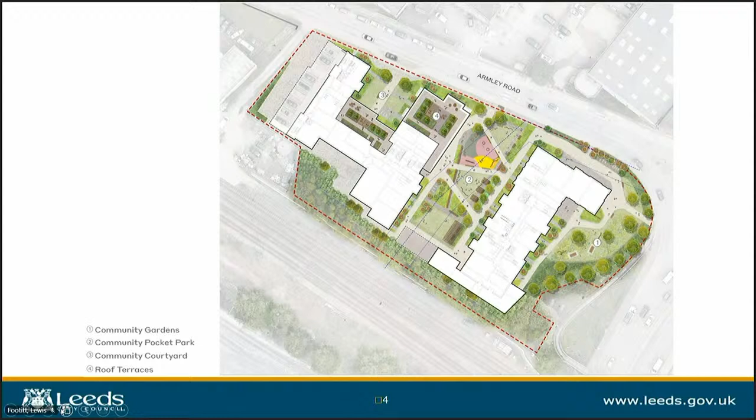Thank you, Chair. Members will recall this scheme was discussed at the March meeting of City Plans Panel, with the item deferred and matters to take away for officers to deal with. Just to refresh memories, this is a CGI of the scheme, and for the benefit of today's audience, the scheme comprises 3 blocks of residential accommodation, totaling 384 apartments, standard units and duplexes. The scheme also provides 191 square metres of commercial floor space and areas of public open space, which I will come on to shortly. This is the site plan on screen, where we can see the relationship between the 3 blocks and the areas of green space just mentioned.

Now, members will recall they were unsatisfied with the proposals on the basis of 3 distinct issues: the proposed level of affordable housing, the level of green space provision and lack of connectivity to nearby green spaces, and the design of the building, most notably how it addresses the corner of Armley Road and Wellington Road, and also the elevation to the A58. So I'll address each of these issues in turn. Firstly, affordable housing.

So I've set out on the screen the progress that's been made on this issue, and the report at section 3.18 sets out the latest and final developer offer on this subject. Members will be aware the proposals were subject to a viability assessment, which set out the threshold on obligations that the district valuer considered for the scheme to become viable, set out at point 2 of the slide.

Further to that appraisal, the developer made an offer at that point of 7 units at discounted rent, taking a longer-term view on the overall profitability of the scheme. The developer has since reappraised their ability to take a longer-term view on profitability and made a final offer to provide 19 units on site as a pro rata extrapolation of the proposed housing mix. This is the final offer which the developer advises is the maximum possible, and it's this that members are asked to consider today. Members are also reminded of the late stage review mechanism secured by the Section 106 agreement to address any further fluctuations in costs and viability at that point.

So the second item is the level of green space provision on the site. Members' concerns were effectively in 2 strands: the level provided within the envelope of the site, and the resulting impact and pressure this scheme would place on existing green space provision in the locality. Members will recall the scheme as presented in March detailed a green space provision of just over 800 square metres.

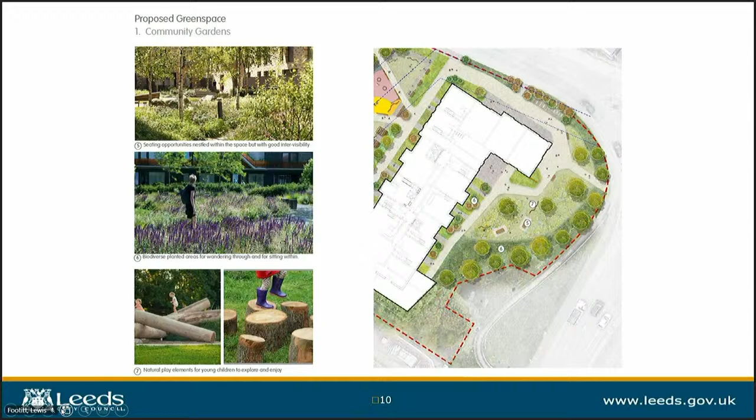We can see the area in question here in its relationship to the cycleway in a section drawing, and we can see how the new area of green space relates to the adjacent roadway from the gyratory, where the new pedestrian and cycle link forms an enclosing element to that space.

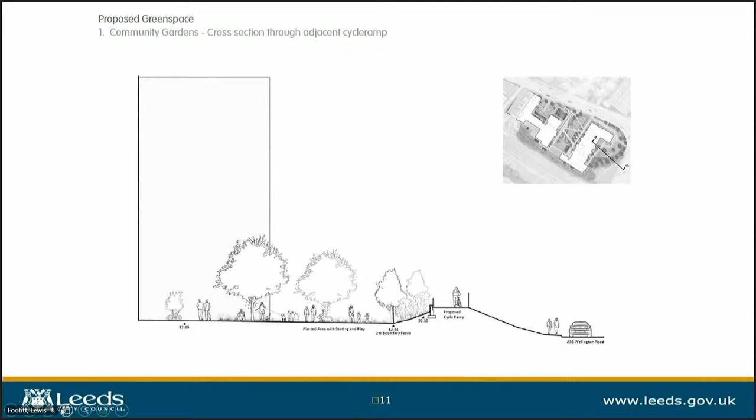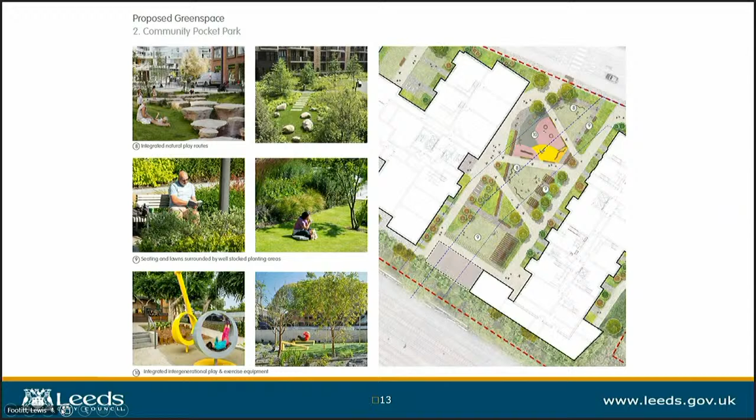And then the final change negotiated by officers is the reworking of the layout of the area at the top of the site, again, which was previously not included in the green space calculus overall, but has been revised to maintain an acceptable layout of defensible space to habitable room windows, which will be buffered using landscaping, but are now also shown to be laid out with seating and lawn spaces, which will be accessible to the public and may provide a useful spot to pause and sit on the journey from Armley Road into the city centre.

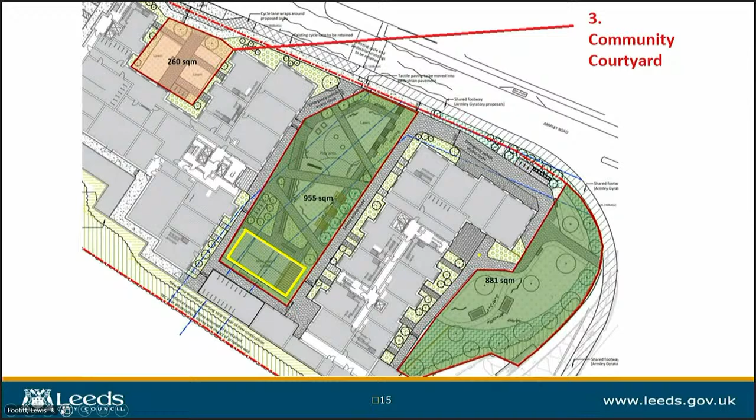Again, the finalised detail of all features here are proposed to be secured through the conditions and the Section 106 agreement in order to maintain public accessibility of the space in perpetuity.

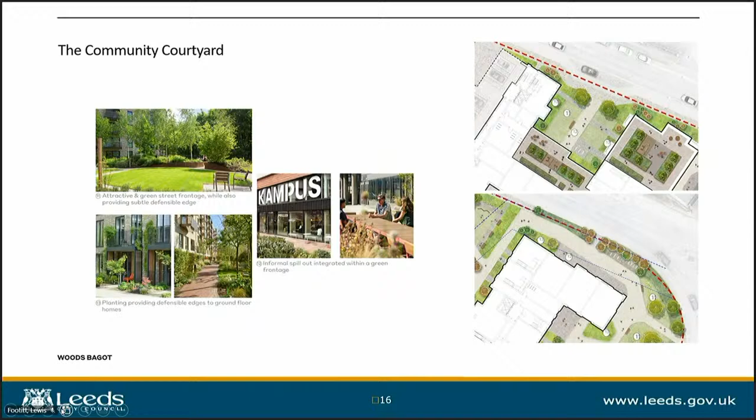So to summarise on the overall issues first strand, the previous scheme would have delivered around 800 square metres. The opportunity presented to the developer and the revised layouts will now instead provide over 2,000 square metres of publicly accessible space within the site envelope.

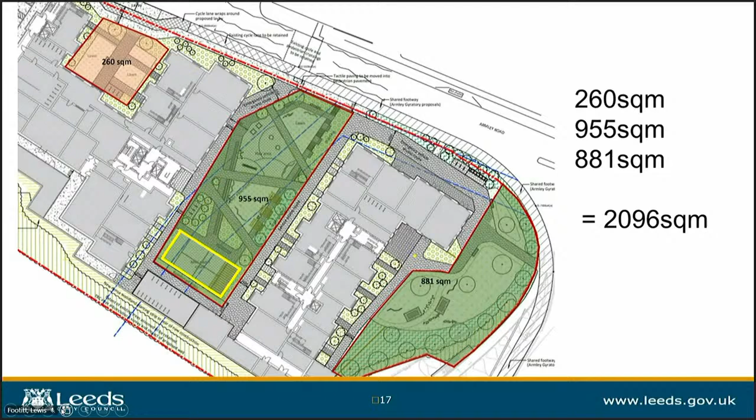Whilst there's no direct comparator to this, just to put that level of provision into context for members, the closest approximate match to that level of provision in the city centre is Park Square, which comes in at just under 2,500 square metres. So that gives you some impression of the amount of space being provided.

So to move on to the second green space issue, members have expressed some concern regarding the pressure this development will place on existing green spaces in the vicinity and how these spaces don't necessarily lend themselves to use by residents in terms of their typology.

To be considered relevant, local green spaces should ideally meet the 720 metre radius shown on the screen there, which reflects the requirement of policy G3 in the core strategy.

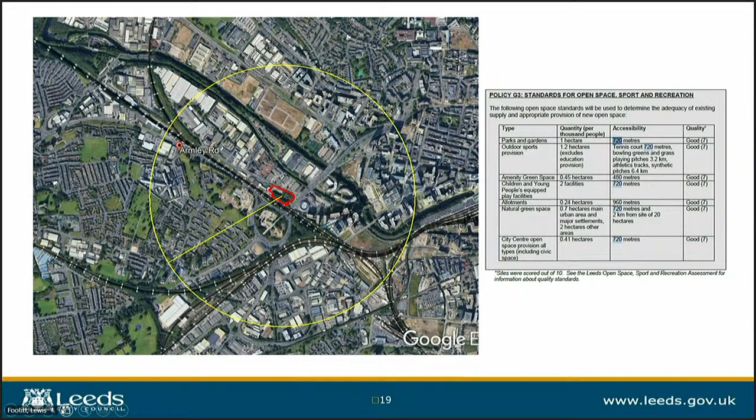Officers have therefore looked at this issue more closely and can advise there is a mixed typology of existing green spaces within the vicinity of the site. The aforementioned additional provision in the site envelope obviously assists in terms of increasing provision, but as you can see from the slide on the screen, there are 4 spaces of different size and flavours which the residents can make use of in the vicinity. I'll go through these now.

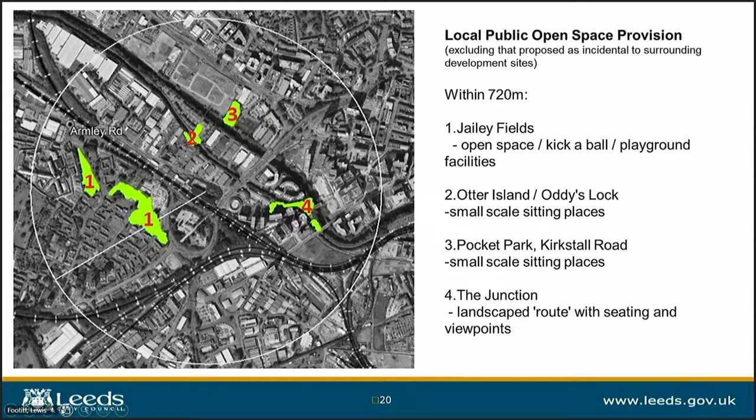The first is within and adjacent to the Otter Island development, where there's some incidental green space in 2 pockets and also access onto Oddy's Lock, which has some seating opportunities and sitting out spaces available there.

The second area is that adjacent to the Powerleague pitches on Kirkstall Road. This area becomes more meaningful and relative to the scheme in that the new pedestrian link across the watercourse is now built and will be operational shortly.

This space affords seating, a place to pause and some limited play space for children. And it's also worth noting at this point that the adjacent City Island scheme will connect into this area and provide a degree of further publicly accessible space.

This slide indicates the closest publicly accessible space at Doncaster Monk Bridge. Whilst it's predominantly a route, the High Line offers an elevated and landscaped area suitable for sitting.

And then finally, and certainly most relevantly, this area shown on screen is known as Jailey Fields. This site lives just across the ward boundary in Armley and Wortley ward and is a council-owned and managed amenity space within walkable distance of the site.

There's some photos of Jailey Fields. This space is of relevance to the site not only by dint of its distance, but also its typology. This is a sort of kick a ball, hit a ball type of space which not too many city centre developments have such ready-made access to.

It's extensive in its scale and therefore differs in character to the smaller pocket and route type spaces I've just mentioned. Jailey Fields includes a number of play and sport provisions.

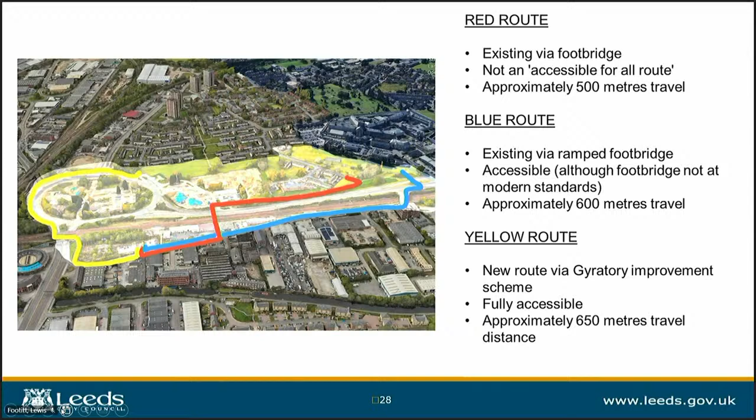And then this could be a wider benefit for not only the residents of this scheme, but the established local community in the adjacent ward. So members are therefore requested to consider this in their overall considerations.

And the final of the three overall issues to address is that of building design. A limited number of the panel members expressed some concern last time round that the proposed building form and facade treatment of the corner building was not of a landmark quality, and given that the building will in effect act as a gateway into the city centre, this should be reconsidered.

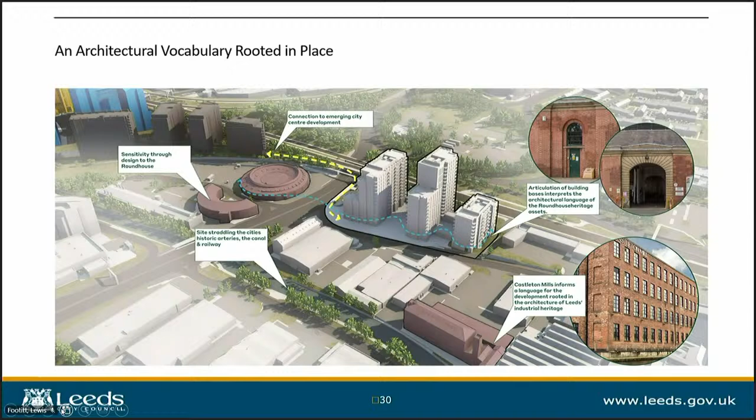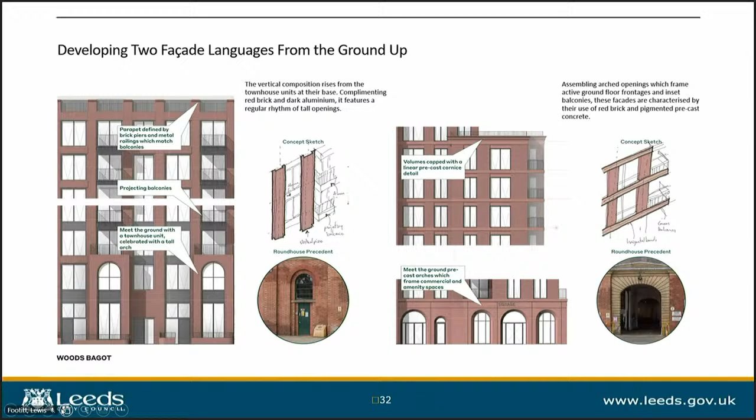In terms of the overall materiality, officers remain of the view that the scheme's character should be set and reflective of the local context. The slide on screen here and the next slide shows how the use of brick and arched openings is contextual in terms of local heritage assets. So officers consider this element of the overall design process undertaken as being sound, and this is maintained in the final design. However, members were quite correct in their assessment that there are opportunities to improve the appearance of the building when approaching from the gyratory towards the city centre.

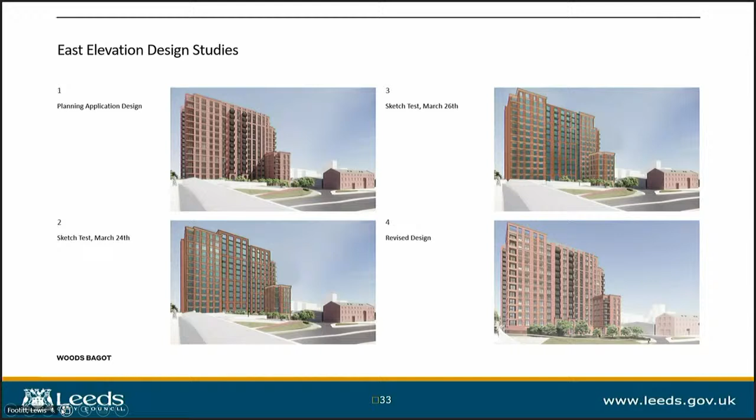The slide on screen shows how this will be achieved. Members would observe in particular the bottom right-hand image here, which is essentially strengthening the building parapet to the left-hand of the facade, to give some more visual gravitas to an element of the building which will be seen mostly by vehicular traffic passing from Armley Road and Canal Street in south-eastbound movements, before their onward connection under the railway and then along the A58 into the city centre.

So that change is finalised and can be seen on screen there, and again here, so you can see the before and after. John Stonnard is with us today from the design team, and he can answer any questions you might have on this specific point.

Essentially, officers consider that this change strikes the balance between improving the building's overall visual standing, but without compromising the relationship to the setting of the heritage assets. Members are therefore asked to consider this in their overall considerations. Thank you, Chair.

Okay, thank you. We don't have any speakers today, but we do have the applicant here if any questions arise during our discussions on this agenda item. So as we have no speakers, I will move directly to questions then. So do we have any questions for officers from members?

No? Oh, okay, Councillor Campbell. Can you just go through the design again? Because I'm looking at that, and the bricks appear to be a different colour, but we'll assume that's part of the problems with CGIs and all the rest of it. But the angle at which we're looking at that is slightly different, isn't it? So this one's slightly sharper, and that one's more that way. So can you just walk me through what's different?

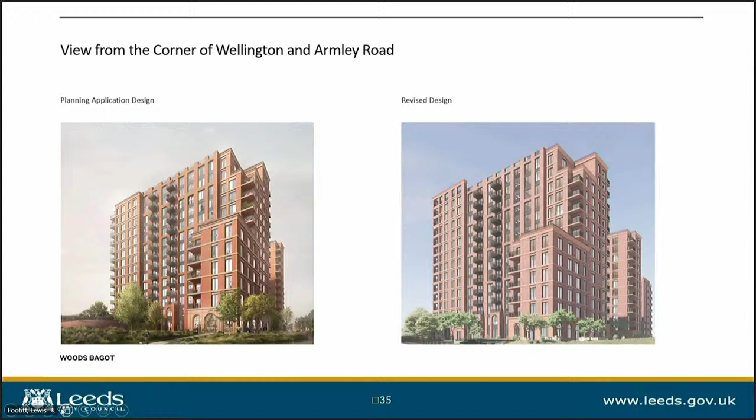So the view was that the real focus of this building was that corner where the parapet has been raised, to strengthen it from the gyratory side. And the approach that was really picked out in the presentation last time, this new route that's been created from the viaduct and around, so that's where the focus is intended to be.

It was well illustrated in the slide. Elsewhere on the building, it's very well articulated. It's got deep reveals, very large windows, balconies, and expression. It's got very detailed brickwork. It has a tripartite arrangement, a clear roof, top, middle, and bottom. The bottom is emphasised with a strong arched colonnade that flows around the corner to emphasise the street frontage. So, as I say, the emphasis was very much placed on that corner.

Okay, thank you. Any further questions before I move to comments? No. Okay, thank you, members. So do members have any comments that they wish to make on the proposals? Councillor Khan.

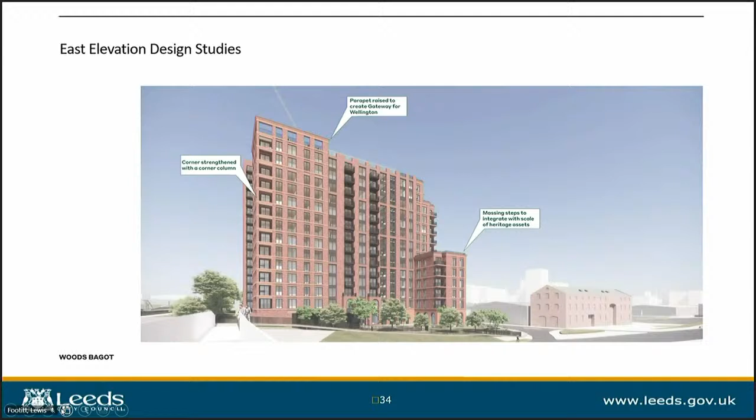Thank you, Chair. Looking at the presentation and the CGI images, I think the design is very impressive. And I also feel that since the last time it was presented and now, it's gone back to the drawing table, and I also welcome the green space for the community as well.

And just on the design, because the ward I represent has one of the most multi-storey blocks, I do welcome the balconies. People want to come out and relax, enjoy after a long day of work as well. So I do welcome the balconies on this design. And as you know, this is...

if somebody's coming into Leeds, this is on the main corridor into our city, and we want to make sure our city represents one of the best cities in the UK. And with that, I'm happy to move for approval, Chair.

Okay, thank you, Councillor Khan, seconded by Councillor Cohen. I did have Councillor Blackburn indicating to speak, so I'll bring him in now. I think I won't say they've done everything that we wanted, but they've made a real effort to try and come up with something, and they did listen to what we said.

I welcome what was said about Gill Field. It needs some investment, and clearly that's the nearest parkland to the site, so I welcome that. But on my way here this morning, I had to go for my eye test, so I was in Pudsey and came down at 72. I went past the site, and I've got to say, that looks a lot better than what's there now.